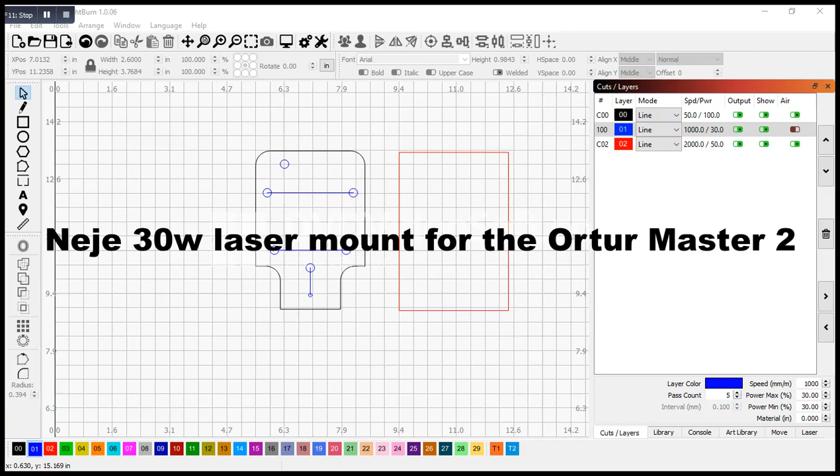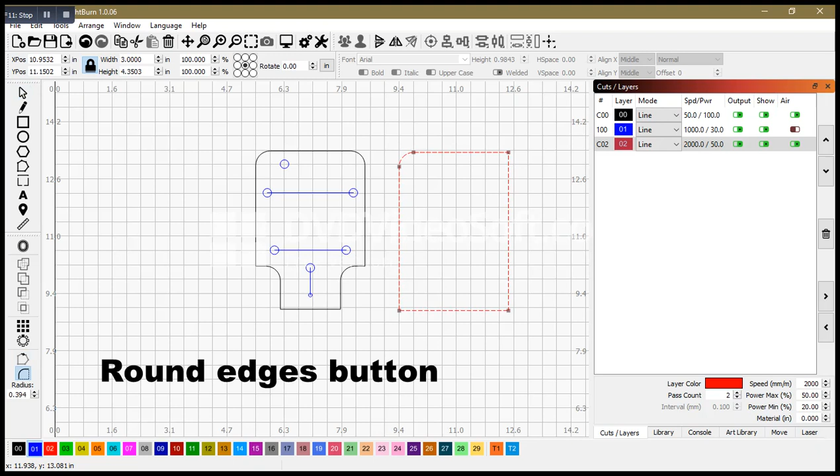Okay, what we have here is your square, a width of 3 inches by 4.35 inches. First things first, you round this edge here. You get around this edge here. Next thing you're going to do, you're going to create 2 smaller squares.

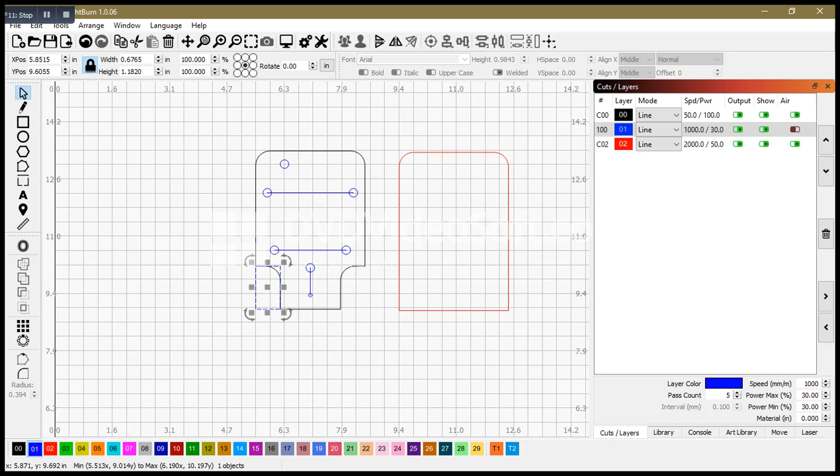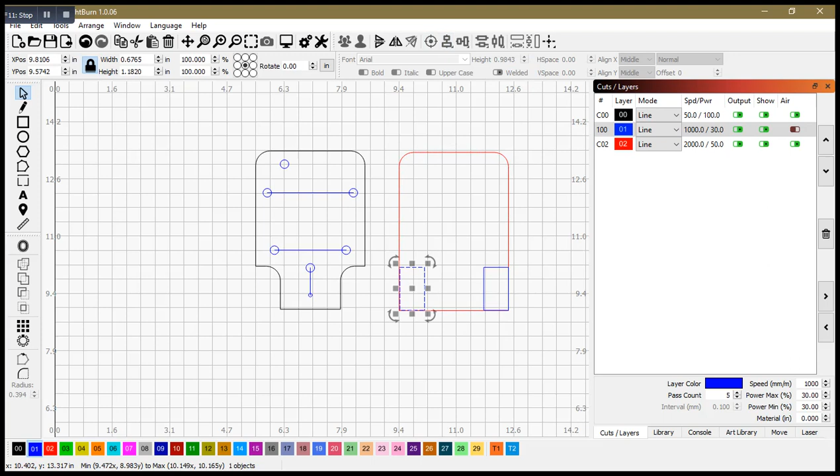All right, there's one of your smaller squares. Copy it, paste it, move your next square over, shift select, align right. Select your blue square on the left hand side, shift select your red square, align left. Okay.

Select again your lower left, and you're going to align to the bottom. Then select again on your right hand side and align to the bottom. Now you're going to round these corners. There you go. There's your rounded corners.

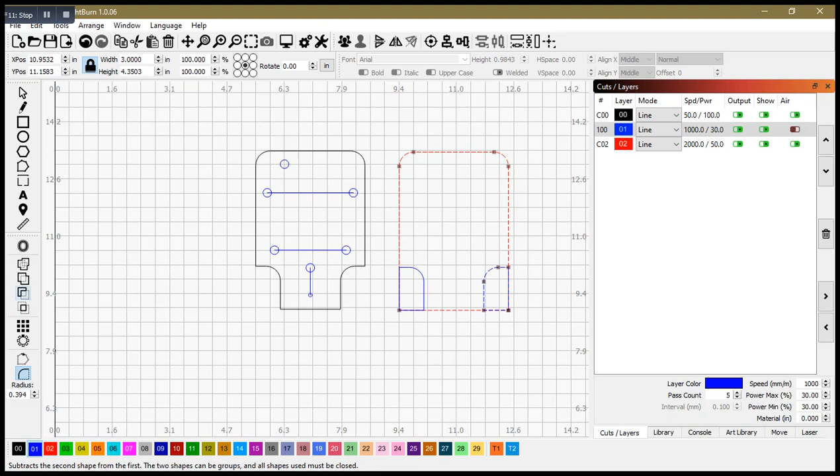Shift select your red circle or your red square. Go up here and cut away. Ooh, maybe I selected it wrong. Let's see. Red square. Shift select blue square. There we go. Remove that. And select your red square, select your blue square, go over here and remove it. Okay, now you have your frame for your mount. Okay.

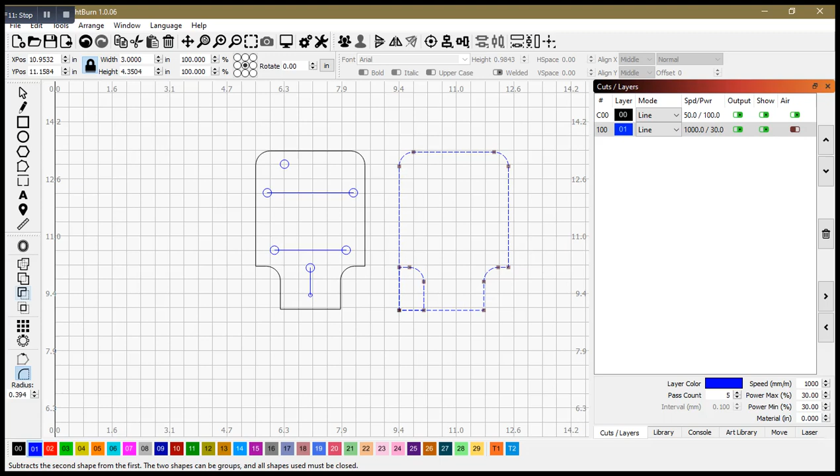Now you'll notice that this bar here is 2.364 inches wide, which is 60 millimeters. Okay, at 60 millimeters, what you're going to do, you want to go 30 millimeters down. So what you'll do is you'll take your bar. I guess we'll go ahead and copy it and we'll paste it. Move your bar over to your 30 millimeter mark. Okay. All right.

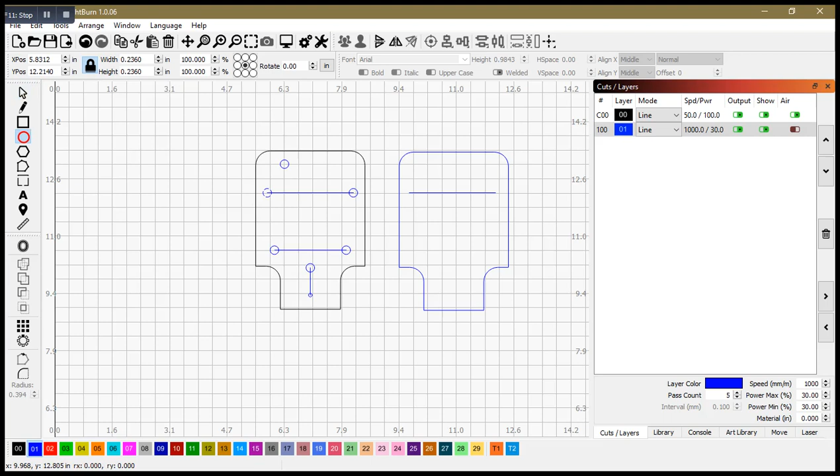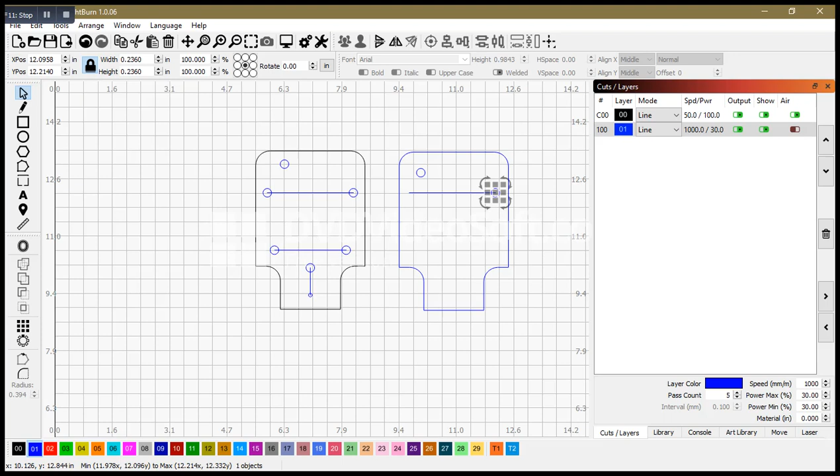Then you've got your 6 millimeter holes. 0.236 is your 6 millimeter hole. All right. Now you can create them right here if you want. Come up here to your sizing box, 236. And if you have this thing locked, it'll carry over and make all your dimensions 236. Copy, paste, select, move, and what you want to notice here is that the circle will center itself directly over your line. Okay, zoomed in a little bit there so you can see better.

Select your next line, which is 50 millimeters. I must have those locked. Let me see. Yeah, I've got it locked. I'm going to ungroup it so you can see what we're saying. Now, this line is 1.97 inches, or 50 millimeters. I'm going to go ahead and copy it and paste it. You're going to move it over, and it's going to be 40 millimeters below the previous one. All right.

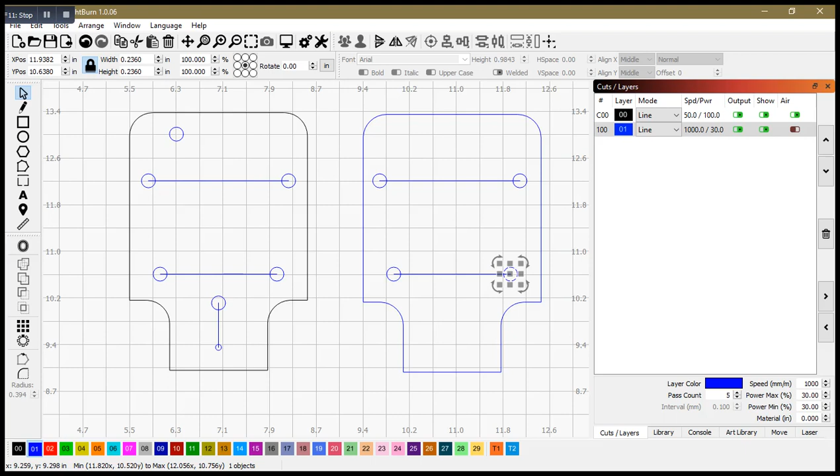Then you're going to use that same 6 millimeter hole, which basically is all over this board. Copy, paste, and it'll lock in right there. Paste, and it'll lock center on these lines. All right. Now to get these lined up properly, you want to go ahead and group them. All right. Group it. Now you want to select your newly formed piece and select your square,

and you're going to align V center. Then you're going to select this one and select your square, and you're going to align it V center. Do not use the horizontal. It will move your lines to the top and the bottom or the center of the screen, and it will mess up your arrangement.

Now, the next one you're looking at is this one. I'll go ahead and ungroup it, so you can see what we got going on here. This circle here is 0.1. Okay, 0.1. Be aware, you have to be careful with this specific circle because your laser is not going to want to cut it properly. Plastic melts if you go too slow. You'll end up with a melted puddle there that you have to drill out anyways. It's easier just to go ahead and drill it out. Make a pinpoint dot there and drill it out.

You can cut all these separately. It's LightBurn. LightBurn will let you divide it up. You can change the color of it and make it 100% separate. See, it's in the orange layer, and you can put it on line. Anyhow, we'll select these. This is also a 6 millimeter hole. We'll select the blue line here. All right, there's your blue line, and it's 0.75 inches. In other words, 3/4 of an inch.

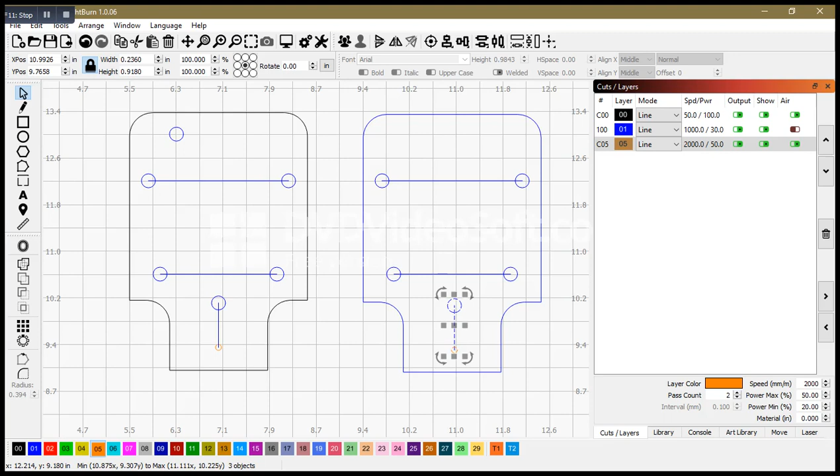You're going to shift and select your square. Go over here, align V center. There you go. And now all of your project is aligned. You can cut this little hole separately after you cut through this other stuff. Now what you want to do here is select it, ungroup it, remove that line. You're not trying to chop lines into your cut. All you want to do here is cut the holes at the correct height.

So ungroup that one, select your line, delete your line, and then here, same thing, select your line, delete your line. Now we'll make one more 6 millimeter hole so you can zip tie your little circuit board to the top. Select, copy, paste, and right about 1 centimeter down, lock it in place. Now, you have everything you need to cut through this.

Now, at 1,000 and 30%, it's going to take you multiple passes to cut through this. I totally suggest using 1/8 inch thick plastic instead of 1/4, but if you want to use the same 1/4 inch thickness that they used, it's about $9 on Amazon.